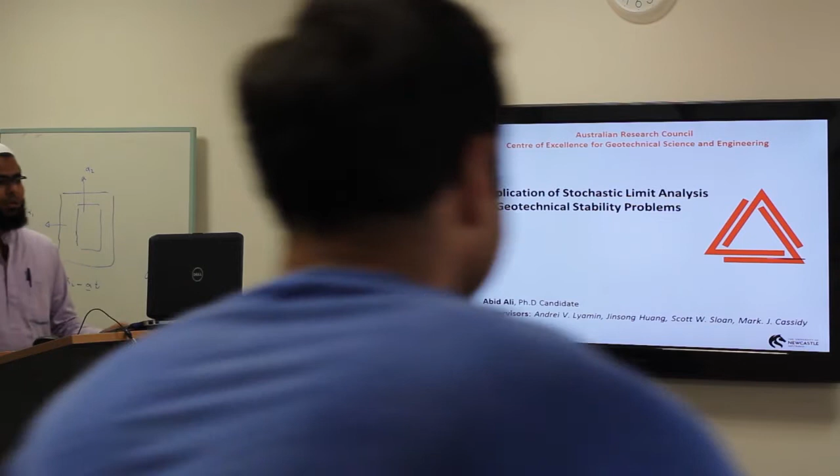Morning to all of you, and I would like to welcome you all to this presentation today, which is on application of stochastic limit analysis to geotechnical stability problems.

This is the outline of today's presentation. In the introduction I will talk about the importance and objectives of the present research work, then the theory and literature review related to the present work will be discussed. After that, I will present two studies I have investigated up to now: one is the deterministic study, boundary effects, and the second is the probabilistic study, which is about risk assessment of landslides. In the last part of the presentation, the future research objectives will be discussed.

Coming to the types of uncertainty, uncertainty in geotechnical engineering can be classified into two types: one is aleatory, and the second is epistemic. Aleatory uncertainty is something which is inherent and cannot be reduced or eliminated, for example spatial variability of soil properties in a nominally uniform soil layer. Whereas epistemic uncertainty is something that can be reduced or even eliminated.

So in the present research work, I have just focused on the aleatory uncertainty that is due to spatial variability of soil properties.

Now, most of the stability analysis in geotechnical engineering adopts a deterministic approach, in which uniform soil properties are considered and the spatial variability is assumed to be considered indirectly by considering a factor of safety. Obviously there are some limitations in this regard because deterministic analysis does not explicitly account for spatial variability.

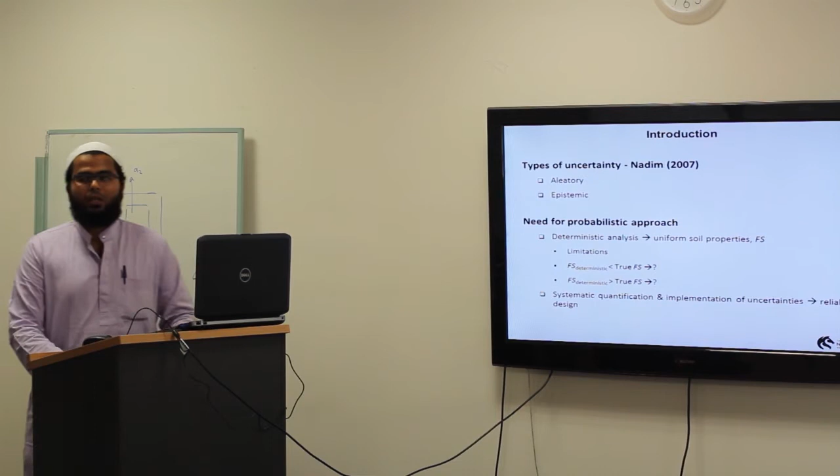What happens is, if the factor of safety using a deterministic approach, which ignores the spatial variability, is less than the true factor of safety of the slope, the design will be uneconomical. On the other hand, if it is greater than the true factor of safety of the slope, the design will be unsafe. So therefore, we need to systematically quantify and implement the uncertainty into analysis in order to achieve reliable designs.

Now coming to the importance of the present study, slope stability is an area that is highly amenable to probabilistic treatment, and it continues to receive much attention, and this could be because landslides have severe consequences.

A recent study revealed that between 2004 and 2010, more than 30,000 people have been killed due to landslides, and these landslides exclude those caused by earthquake. Apart from causing fatalities, landslides also cause damages to infrastructure and properties worth billions of dollars every year.

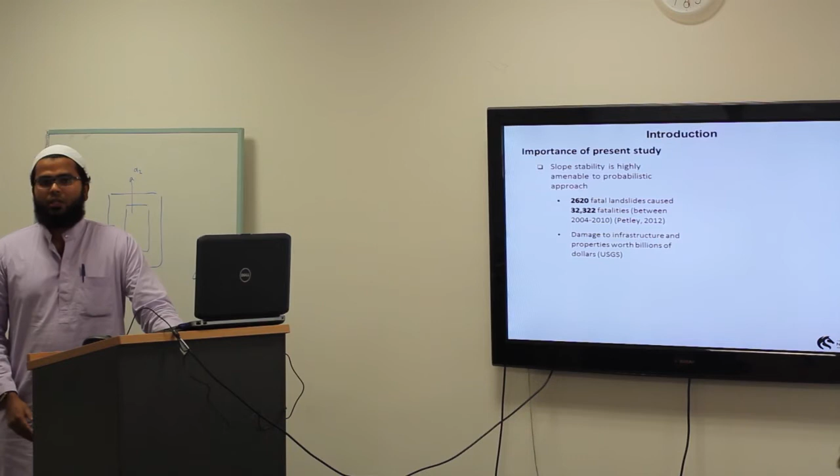Due to spatial variability of soil properties, complex failure mechanisms also tend to evolve during landslides, and therefore there is a need to develop innovative methods for landslide risk assessment which can consider the uncertainty in the soil properties.

Now I will discuss the objectives of the present study. One of the major objectives is to combine random field and finite element limit analysis. Why? Because finite element limit analysis is an excellent tool for predicting the collapse state of the slopes, whereas random field can effectively consider spatial variability.

And the second stage involves incorporating unsaturated seepage analysis, so that the framework of random field and finite element limit analysis can then be used to predict the probability of failure during rainfall.

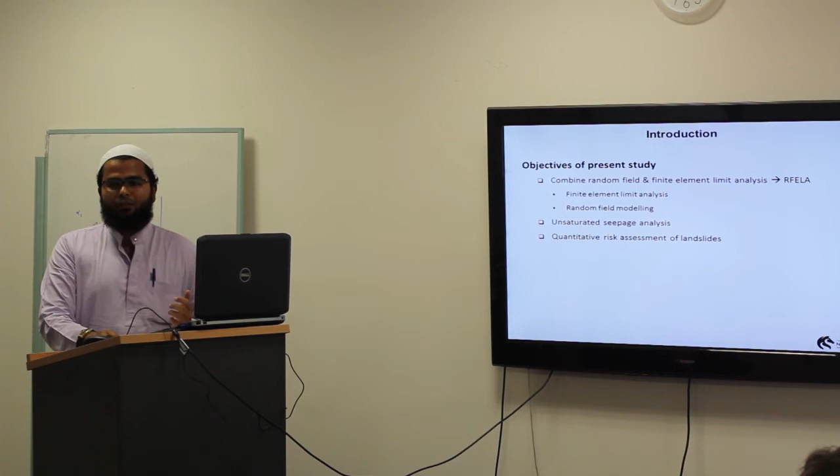And lastly, using the quantitative risk assessment of landslides framework, the risk from different sources of uncertainty can be evaluated.

Now this method is general in nature, and it is extendable to other geotechnical engineering problems as well. But to begin with, we actually did a 1D deterministic study, and then we progressed to a 1D probabilistic study. This 1D deterministic and probabilistic study involve unsaturated seepage analysis, and our ultimate goal is to perform 2D probabilistic studies which also involve unsaturated seepage analysis.

So now I'll discuss a few of the commonly adopted probabilistic approaches for slope stability.

The first is the second moment method, which yields a reliability index beta. Here mu FS is the factor of safety based on mean values, and sigma FS is the standard deviation in the factor of safety. The problem with FOSM is that it yields non-unique solutions depending on how the problem is formulated.

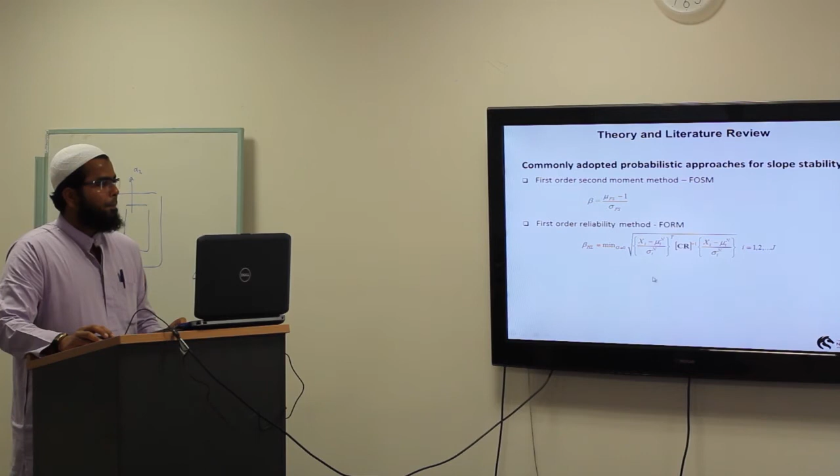Then we have the first order reliability method, FORM, which yields another reliability index called the Hasofer-Lind reliability index. This process basically involves finding a set of random variables x having a mean mu and standard deviation sigma, so that the limit state function g is minimized, where CR is the correlation between the random variables. FORM is a better procedure than FOSM, but the problem is determining the limit state function in complex problems.

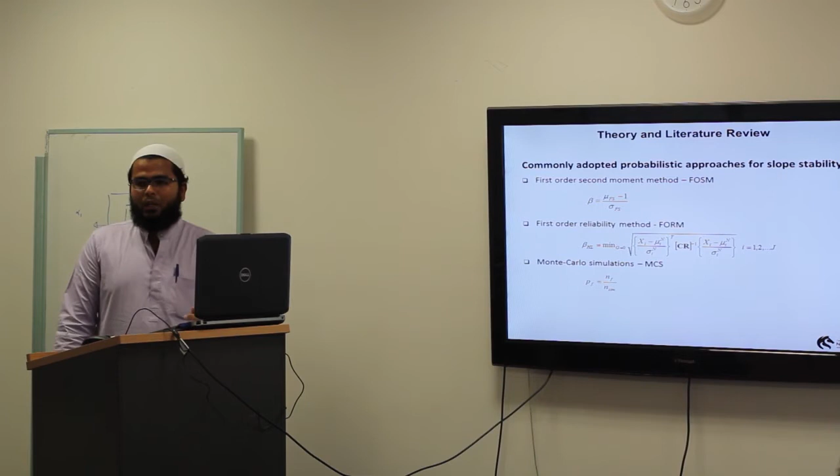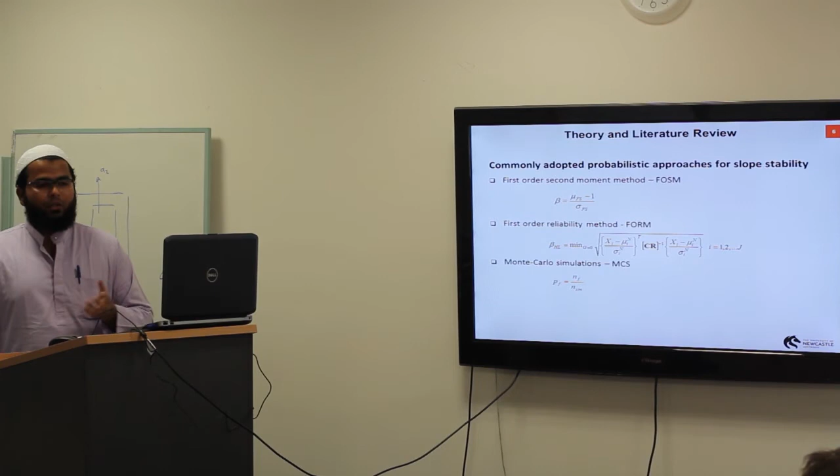Then we have the Monte Carlo simulation technique, in which multiple simulations are performed based on different values of random variables sampled from a distribution. It yields the probability of failure, defined as the number of simulations resulting in slope failure divided by the total number of simulations. Monte Carlo simulation is simple in concept and can be extended to difficult problems, but sometimes a large number of simulations may be required when the probability of failure is low, and in those cases we can use different sampling methods to reduce the number of simulations.

Coming to the random field theory, what is a random field? In a random field, the soil property at a point is assumed to be a random variable, and it is then considered to be correlated to the random variables at adjacent points in some manner. The set of all random variables in a domain is called a random field.

Though the first order methods, FOSM and FORM, have been combined with random field for slope reliability, there are some limitations in this regard, basically due to the use of limit equilibrium methods, which cannot properly consider spatial variability.

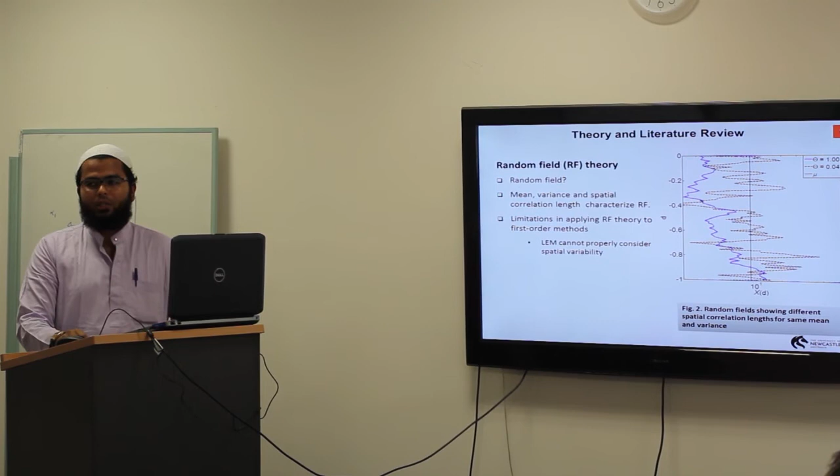On the other hand, we have the random finite element method, which combines a random field and finite element together for predicting slope reliability, and it can effectively consider the spatial variability.

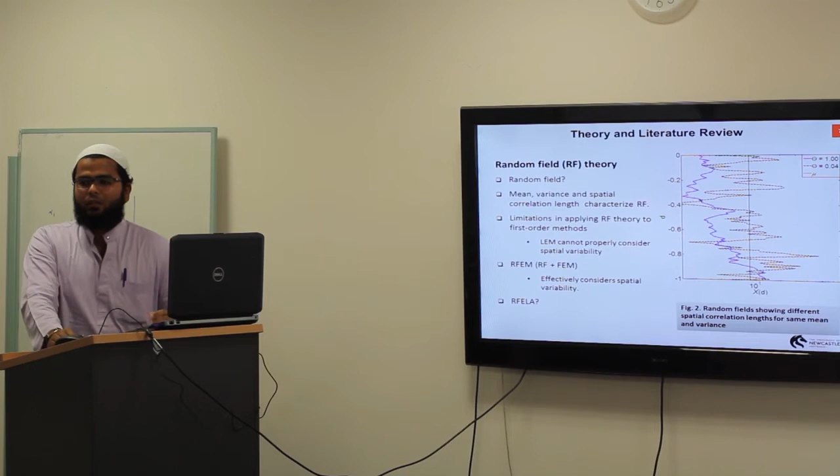Regarding the combination of random field and finite element limit analysis, not many studies are present in the literature, so there is much scope of work in this area.

Now for probabilistic slope stability analysis, we require a deterministic method of assessing the stability of slope. So here I will discuss some of them.

Limit equilibrium method is the most simple one, and it has been used for quite a long time, but its biggest disadvantage is that it requires an assumption regarding the failure surface, and poor assumptions of the failure surface can lead to poor estimates of the stability.

Finite element method, on the other hand, does not require any assumption about the failure surface, but it requires excessively large computational time, and it basically relies on non-convergence as an indicator of collapse in the slope. So care should be taken that the non-convergence is due to collapse only and not due to some other numerical effect. A common limitation observed in these two methods is that there is no indication about the error.

Finite element limit analysis, on the other hand, has no assumptions regarding the failure surface. It is efficient, it is robust, and it gives a bound on the error.

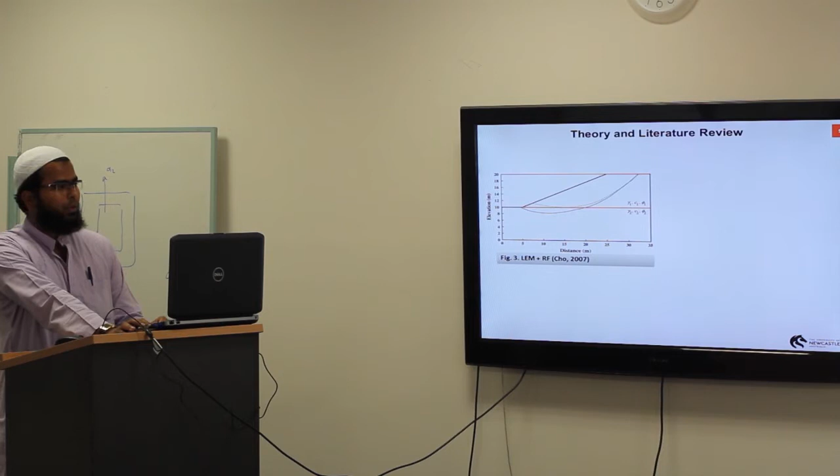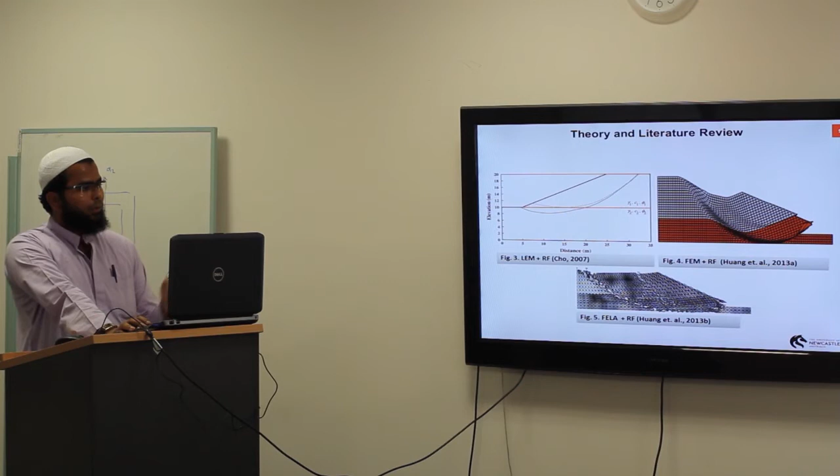This figure shows an example of limit equilibrium method combined with random field. This shows an example of finite element method combined with random field, and this shows an example of finite element limit analysis combined with random field. We can see how well the finite element limit analysis can predict the collapse state in slopes.

Since I have performed a few studies on rainfall induced landslides, I would like to present the two most important factors which affect the stability of a slope during landslides. The first is the saturated hydraulic conductivity.

Previous researchers have suggested that instead of using saturated hydraulic conductivity alone, it is better to use the I by Ks ratio, where I is the rainfall intensity and Ks is the saturated hydraulic conductivity. As this figure shows, as the I by Ks ratio increases, there is a greater reduction in the pore water pressure. Previous studies reveal that a critical I by Ks ratio exists, beyond which there is a maximum reduction in the pore water pressure and the factor of safety.

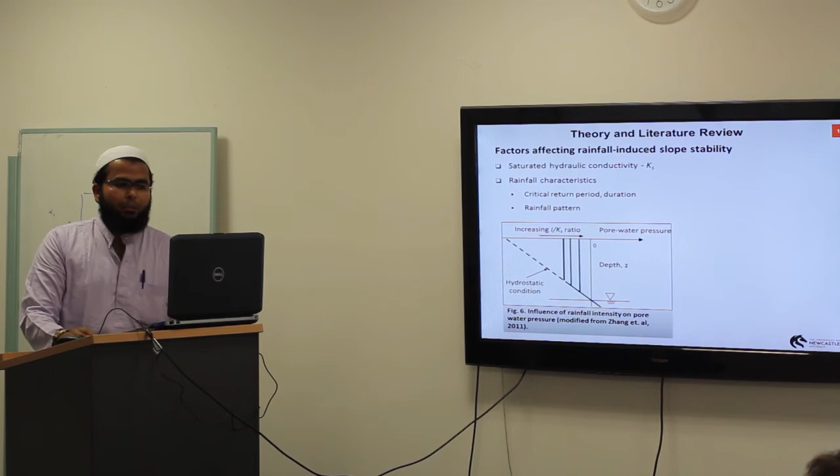The second important factor is the rainfall characteristics. Previous studies reveal that a critical return period and duration exists at which the factor of safety is minimum. Also, four rainfall patterns have been investigated, among which the advanced rainfall pattern has been found to be the most critical in reducing the pore water pressure and the factor of safety of the slope.

Now we'll talk about the risk assessment framework. This figure shows the traditional risk assessment framework, where the probability of failure is calculated from a number of Monte Carlo simulations and it is multiplied by a fixed consequence to get the risk.

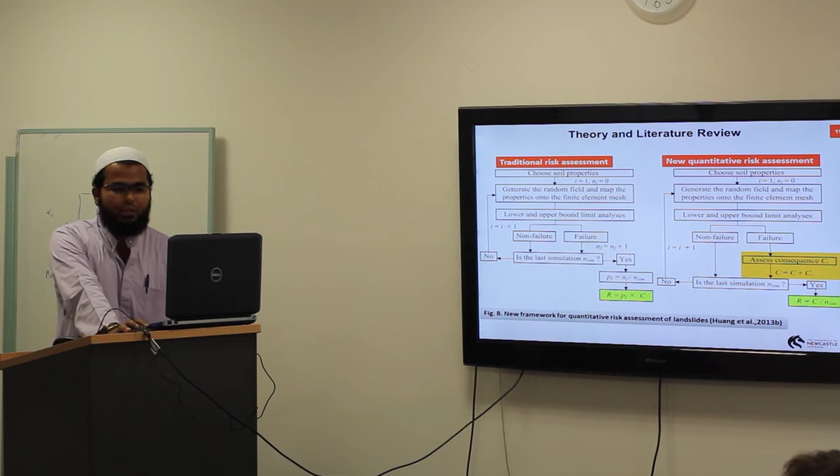On the other hand, we have the new framework for risk assessment, which says that the consequence should be assessed individually for each failure, and this leads to a modified definition of risk, as can be seen. So I will be adopting the new quantitative risk assessment framework in my studies.

Now, coming to the studies on soil spatial variability, studies which investigated the influence of shear strength variability on slope reliability. Most of the studies which investigated the influence of shear strength variability on slope reliability, they considered the influence only on the probability of failure.

Huang et al. investigated the influence of shear strength variability on landslide risk, but the results had a significant gap, and it was basically due to a coarse uniform mesh which was used for assessing the stability of the slope.

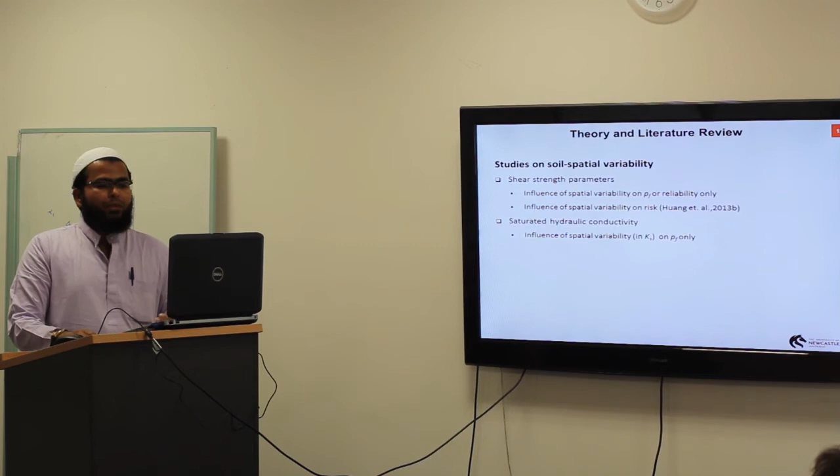And then studies which investigated the influence of spatial variability in saturated hydraulic conductivity on slope reliability. First of all, there are a few studies in this area, and also most of the studies, they investigated the influence once again only on the probability of failure.

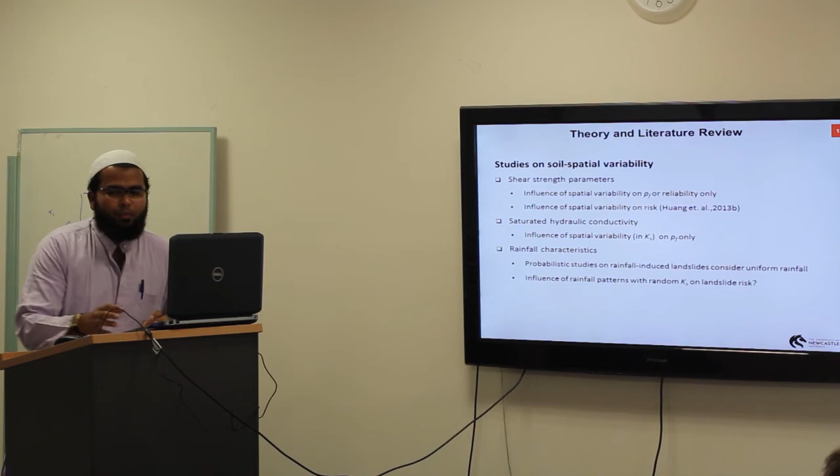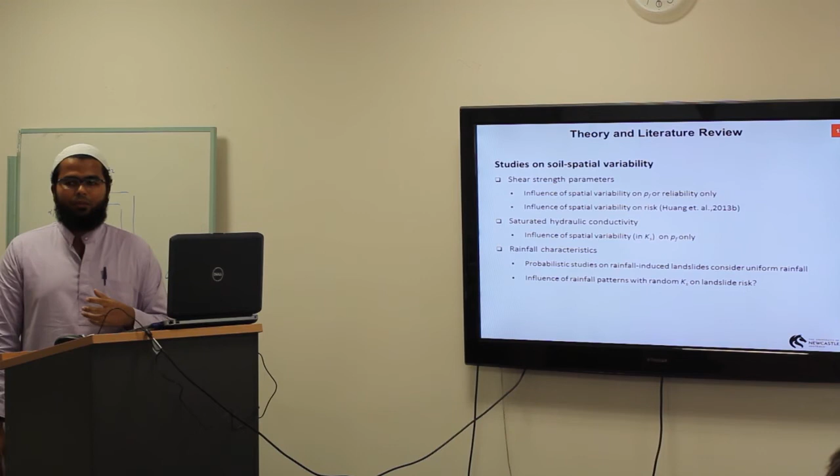And lastly, we have the rainfall characteristics. Most of the studies which investigated rainfall induced landslide using a probabilistic approach, they considered a uniform rainfall and no variation was generally observed, and therefore there is a scope for evaluating the influence of rainfall pattern with spatially variable saturated hydraulic conductivity on the landslide risk.

As I mentioned before, as the first step towards the big research plan, we initially did a deterministic study, and this is the deterministic study that I will present now. Most of the studies which considered rainfall-induced landslides, they generally have an infinite slope with an impermeable boundary. This sort of predetermines the failure surface. In reality, it is possible that other boundary conditions can exist, so no study has actually systematically investigated the influence of different boundary conditions on the failure.

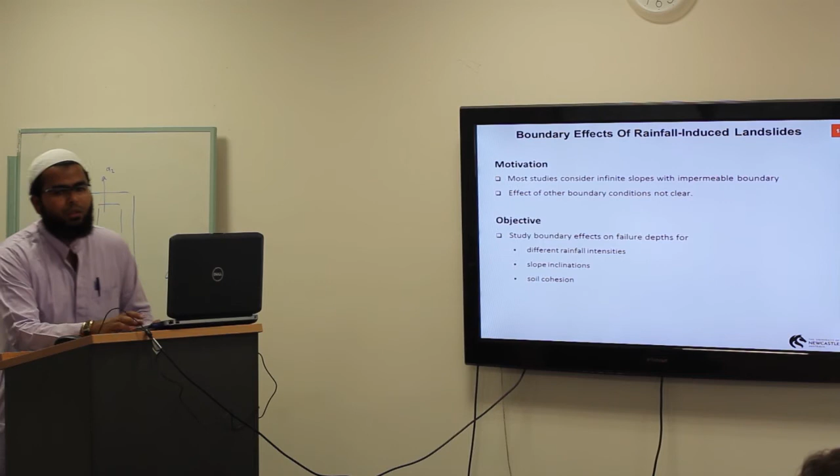That is why the objectives of the present study are to evaluate the effects of boundary conditions on the failure depth when we have different rainfall intensities, different slope inclinations, and different soil cohesion.

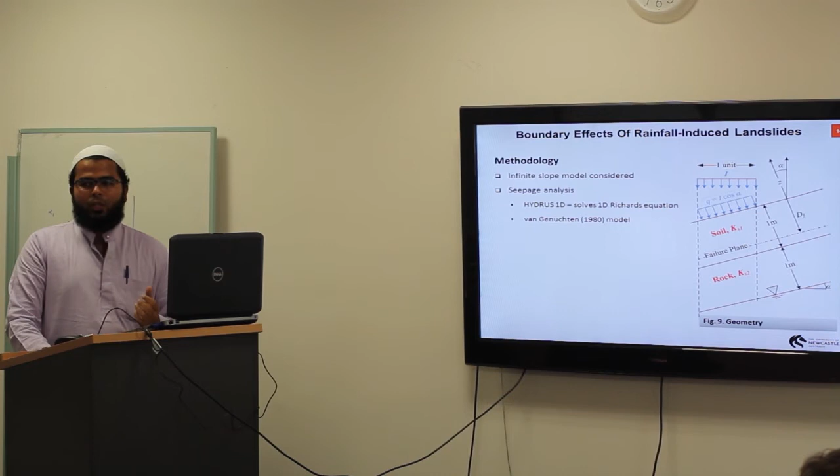Coming to the methodology, I considered an infinite slope, and this figure on the right shows the geometry of the slope. I will explain the geometry later. Rainfall infiltration was modeled using 1D seepage analysis, which was done in Hydrus 1D. Hydrus 1D basically solves a modified form of 1D Richards equation, and we use the Van Genuchten model as the hydraulic model.

Slope stability was assessed using this analytical expression, where phi dash and c dash are the effective shear strength parameters, and alpha is the slope inclination, SE is the effective degree of saturation, UW is the pore water pressure at the failure depth, and W is the weight of the failing soil mass.

I used the Mohr-Coulomb model to define the shear strength in terms of effective stress parameters, and the Bishop's formulation was used to extend the Mohr-Coulomb model to unsaturated soils. In Bishop's formulation, the pore air pressure UA was considered as 0, and the coefficient of effective stress Chi was considered equal to the degree of saturation SE.

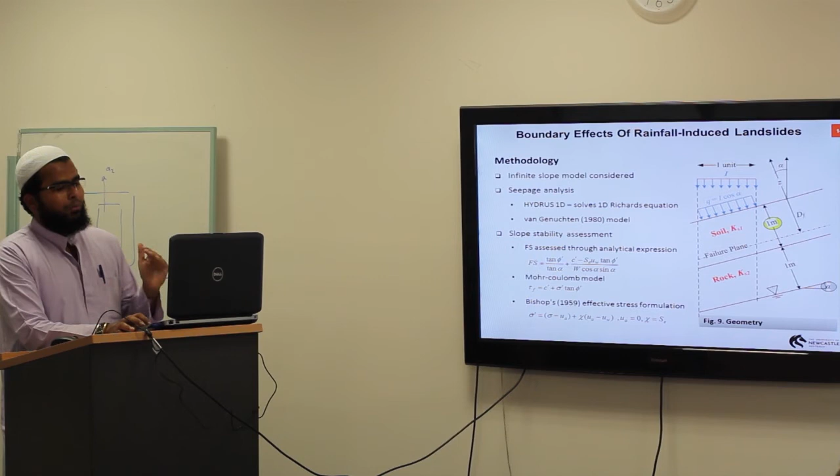Now coming to the geometry of the model that I considered, the slope has an inclination alpha, and it basically considers a 1 meter thick soil layer lying above a rock.

The water table is measured 2 meters along the Z direction, which is the slope normal direction, and the initial conditions are hydrostatic. The rainfall intensity is I, and the flux infiltrating the slope is Q, assumed to infiltrate normal to the slope.

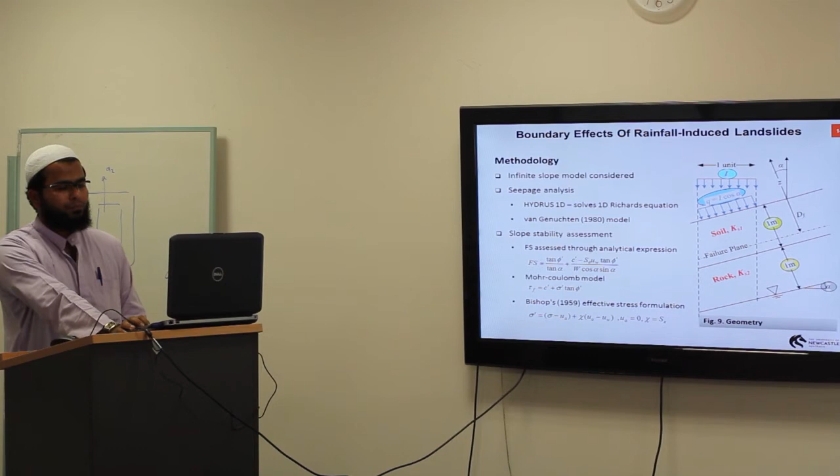The failure depth dF is measured along Z, that is in the slope normal direction. So we considered different boundary conditions by adopting different ratios of Ks1 by Ks2.

Ks1, as shown in the previous figure, is the saturated hydraulic conductivity of the soil, and Ks2 is the hydraulic conductivity of the rock, and this index was used as an index of degree of permeability of the boundary.

If this ratio is very small, the boundary is fully drained, allowing the flux to drain out. If it is very large, it implies an impermeable boundary, and all the infiltrated flux accumulates at the boundary. So we considered 4 cases.

Case 1 considers alpha equal to 36 degrees and a cohesionless soil, C dash equals 0, and this was the base example. In case 2, we increase the cohesion.

In case 3, we change the slope inclination to 40 degrees, but the cohesion was the same. In case 4, both the slope inclination and the cohesion were changed.

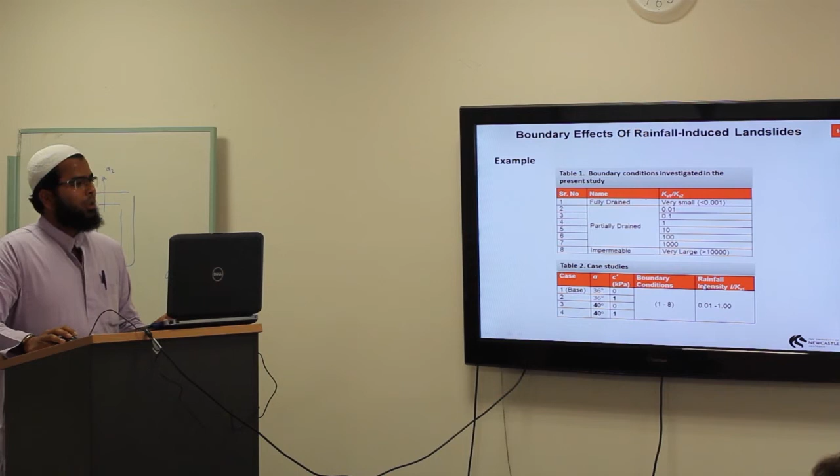Now all the boundary conditions shown in table 1 were adopted for all these 4 cases, and the rainfall intensity was considered in terms of the I by Ks1 ratio, where I is the rainfall intensity and Ks1 is the saturated hydraulic conductivity of the soil.

We considered this rainfall to vary in this range, and we considered 24 different rainfall intensities.

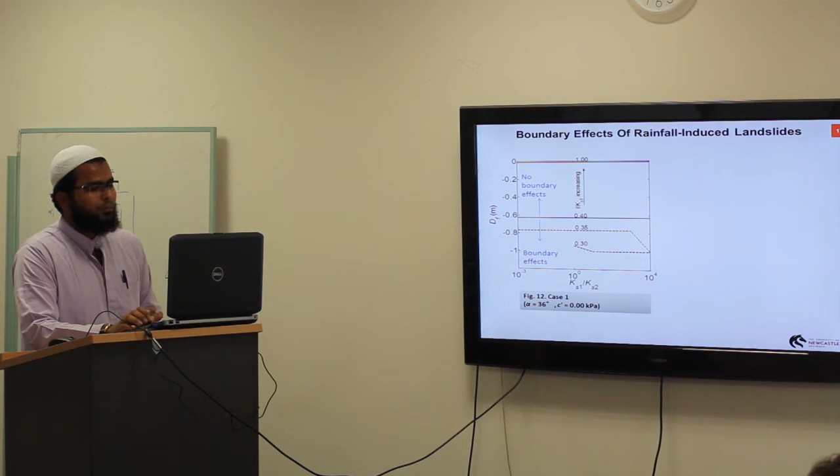The dashed line shows those failures where boundary effects could be observed, and when the rainfall intensity exceeds this value, there is no effect of boundary on the failure. A critical I by Ks1 ratio is observed, which demarcates this boundary influence.

Now in case 1, all the failures were due to loss of suction.

In case 2, we see that there is no influence of rainfall intensity on the failure depth, and all the failures have a constant depth, because the failures occur due to generation of positive pore pressure.

This critical intensity is the value of rainfall intensity up to which the boundaries exercise influence on the failure depths. Once this rainfall intensity is exceeded, the boundaries have no influence on the failure depth.

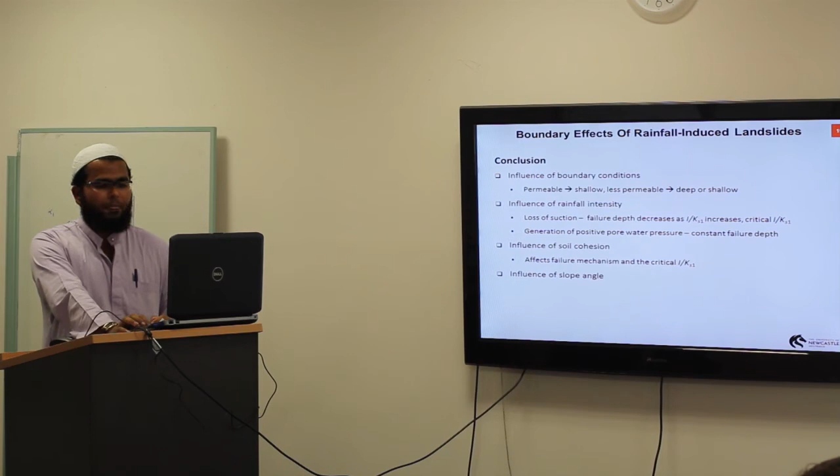When soil cohesion is increased, the critical I by KS1 is increased, which means an increase in the boundary influence. And when slope inclination is increased, the critical I by KS1 decreases, which implies a decrease in the boundary influence.

Now I'll explain the 1D probabilistic study.

Rainfall-induced landslides basically occur in initially unsaturated soil slopes where the negative pore pressure contributes to the soil strength and slope stability.

In the event of a landslide, there are two things which can determine risk. One is the saturated hydraulic conductivity, because it controls the infiltration process, thereby affecting the pore pressure distribution and ultimately affecting the shear strength and the slope stability.

And the failure mechanism, because they affect the failure depths as we observed in the previous 1D deterministic study. So the objective of the present study is to investigate the influence of spatial variability in the hydraulic conductivity on the probability of failure, consequence and risk, and also determine the influence of different failure mechanisms on risk.

Now the same methodology as was adopted in the deterministic study was considered for this case as well, and I considered 2 examples having different soil cohesions. These 2 examples were considered to create different failure mechanisms, and if we have a look at this figure,

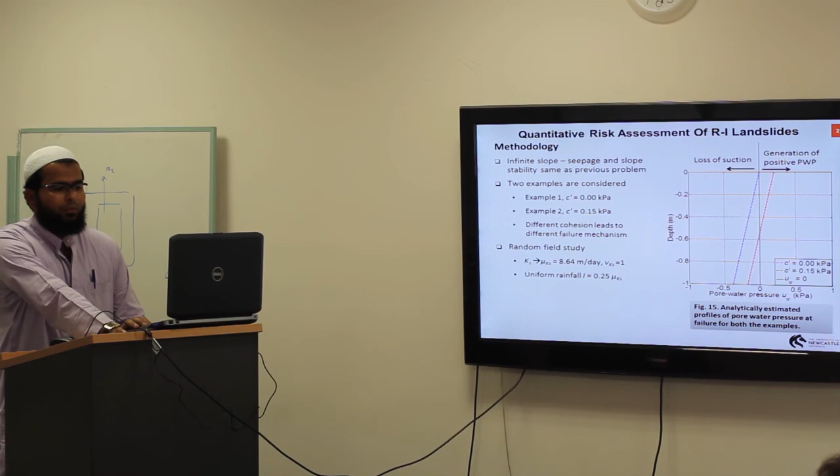Now coming to the random field study, the saturated hydraulic conductivity was considered as a log normal stationary random field having a mean of 8.64 meters per day and coefficient of variation equal to 1. I considered the uniform rainfall intensity equal to 0.25 times the mean value of Ks.

To consider the different degrees of spatial variability, 8 spatial correlation lengths were considered, and I performed 2000 Monte Carlo simulations for each spatial correlation length.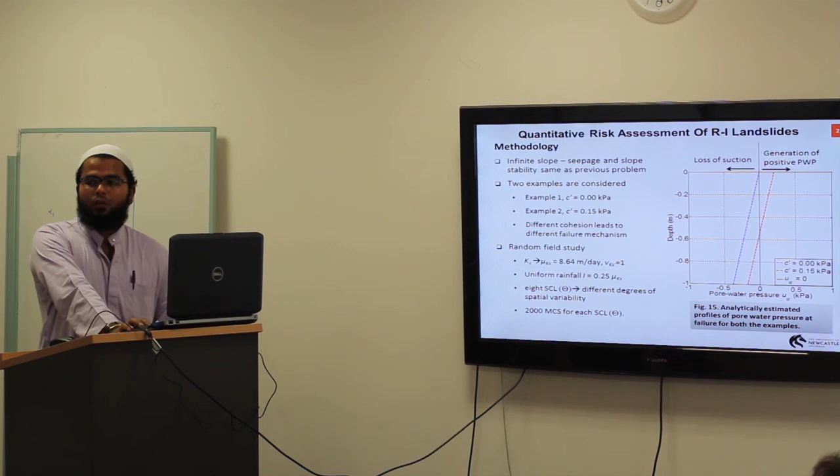Now this figure shows the failure mechanisms occurring, and in this figure the blue hollow points show failure due to loss of suction, and the red solid points show failure due to generation of positive pore water pressure. The black solid line shows the analytically estimated pore water pressure at failure.

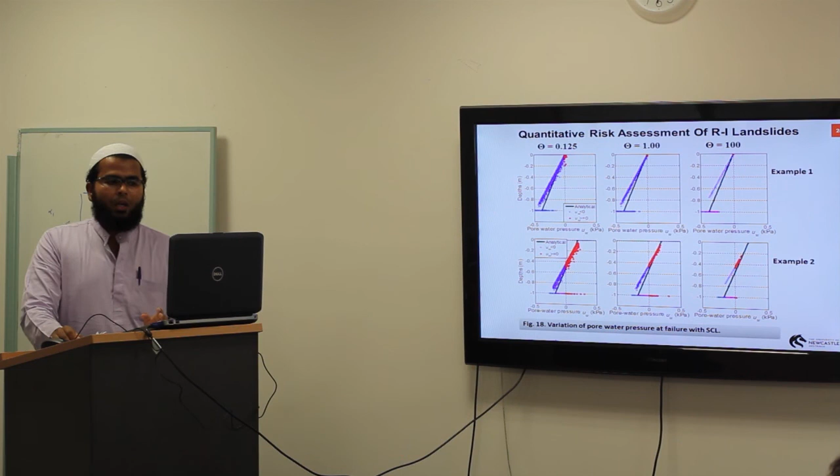I have shown the results for 3 spatial correlation lengths for both the examples, and we can see that when the spatial correlation length is small, there is more uncertainty in the pore water pressure at failure, and as the spatial correlation length increases, the trend in pore water pressure at failure becomes much more uniform and linear because the soil also becomes uniform. This also confirms our assumption about the failure mechanism.

We can see that most of the failures in example 1 are indeed due to loss of suction, and in example 2, most of the failures, in fact in the top half, are due to generation of positive pore water pressure.

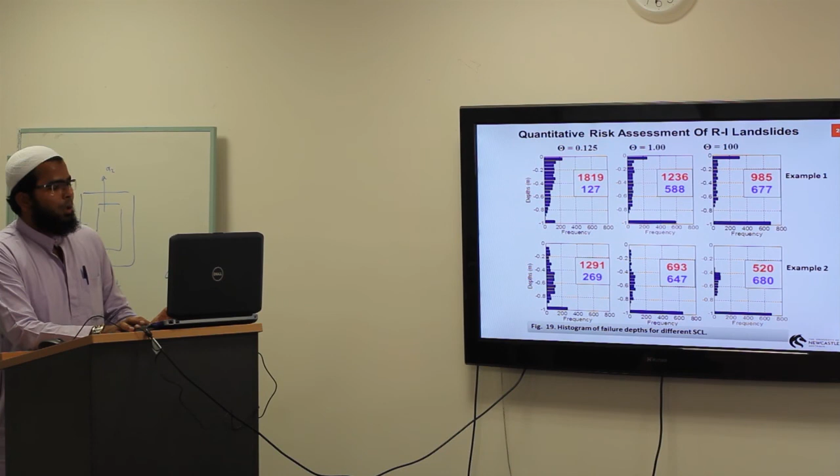This figure compares the histogram of failure depth from the two examples. It's a very interesting figure. This shows how many shallow failures are occurring, and this shows the number of deep failures. We can observe that when the spatial correlation length is small, there are more shallow failures and fewer deep failures. As the spatial correlation length increases, shallow failures decrease and deep failures increase, and this can be observed in both examples.

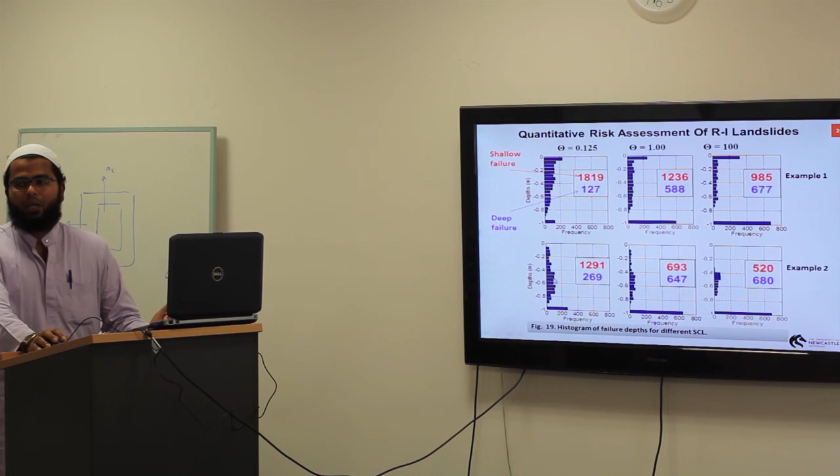Another point I want to make is the pattern of the distribution of failure depths. In example 1, most of the failures are concentrated near the surface, and in example 2, due to a change in the failure mechanism, the failure tends to be deeper.

This figure basically explains the variation in probability of failure: why we have higher probability of failure at smaller correlation lengths, because we have more shallow failures, and why the consequence increases because the deep failures increase and the shallow failures decrease, which is why we see an increase in the consequence.

Another explanation is why the consequence was higher in example 2 compared to example 1. We can see that most of the failures are concentrated near the middle of the soil profile, so failure in example 2 tends to be deeper compared to example 1, and this is the main reason for the increase in consequence of example 2.

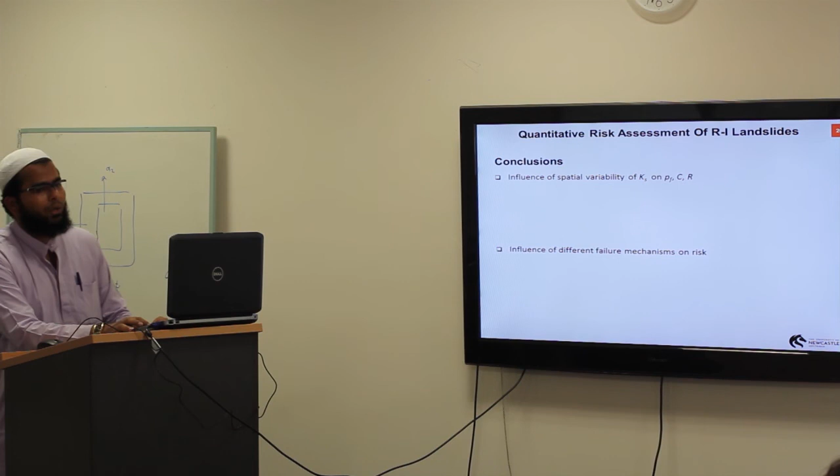Coming to the conclusions: we investigated the influence of spatial variability of Ks on the probability of failure, consequence and risk. We saw that the probability of failure decreases with an increase in spatial correlation length, the consequence increases with an increase in spatial correlation length, and the risk will be maximum at a certain degree of spatial correlation length. Regarding the influence of failure mechanism, when failures occur due to generation of a positive pore pressure, the risk tends to be higher.

Given the work I have already done, I would like to outline the future work. As an initial step, we considered an infinite slope with a 1D deterministic study, and then we did a probabilistic study to incorporate the random field and the risk assessment framework. Now we plan to extend this procedure to 2D slopes.

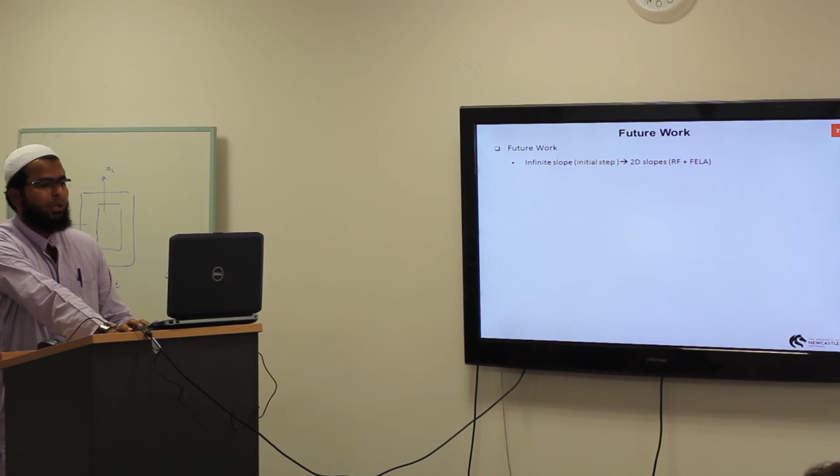By using finite element limit analysis as the deterministic method of slope stability, what we are going to do initially is consider the spatial variability in shear strength for both drained and undrained slopes, and combine the random field and finite element limit analysis. In the finite element limit analysis we will use adaptive meshing.

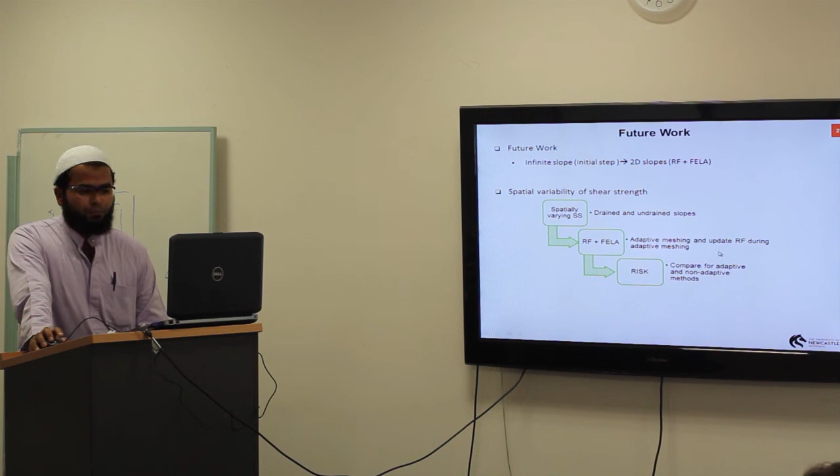Simultaneously, the random field will be updated to account for the adaptive meshing, and then we plan to compare the risk obtained from both the adaptive and non-adaptive methods.

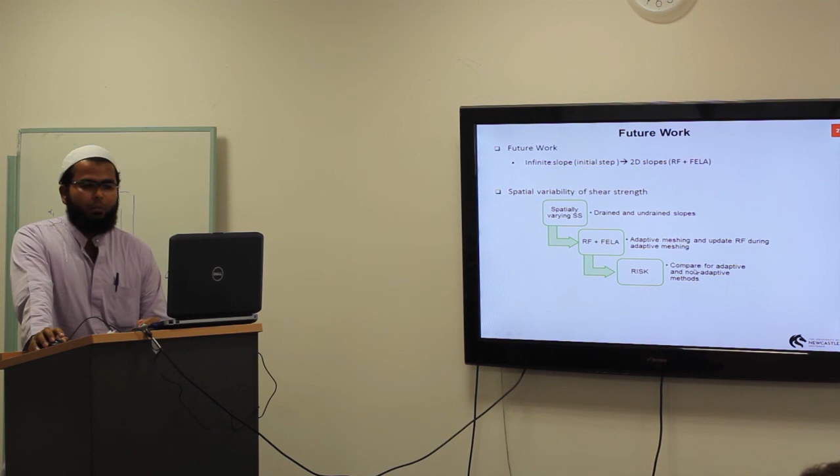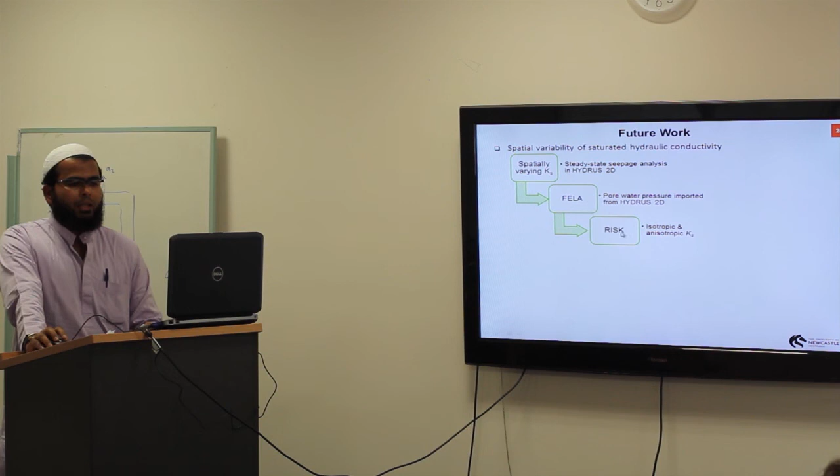In the second stage, we will investigate the influence of spatial variability of saturated hydraulic conductivity on the landslide risk. We will perform steady state seepage analysis using Hydrus 2D, then import the pore pressures from Hydrus 2D into the finite element limit analysis codes to assess stability, and compare the risk for isotropic and anisotropic saturated hydraulic conductivity.

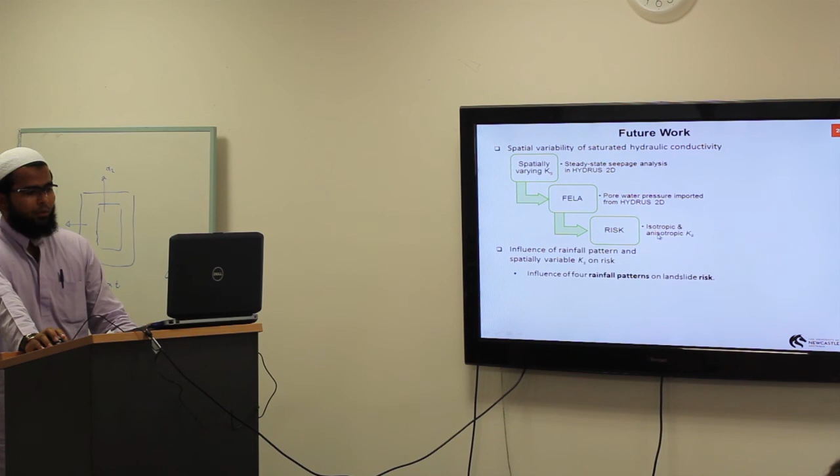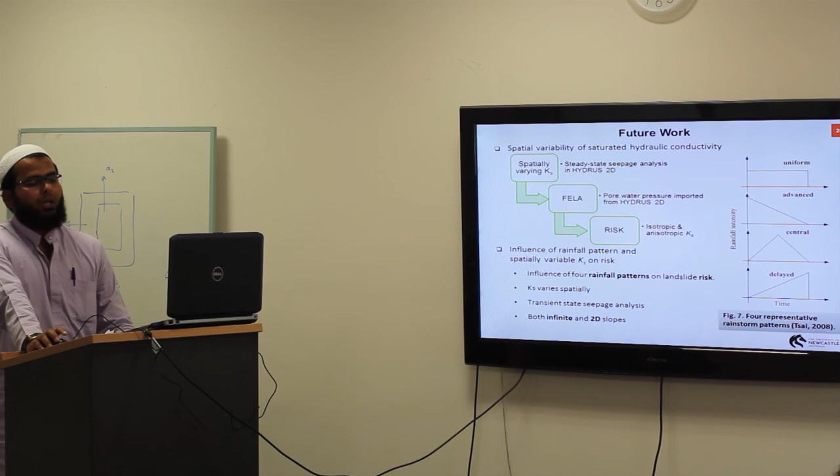In the last stage, I will consider four rainfall patterns. Their influence on landslide risk needs to be investigated, also considering the saturated hydraulic conductivity to vary spatially. This will involve a transient seepage analysis, and this study will be done initially for an infinite slope and then extended to a 2D slope.

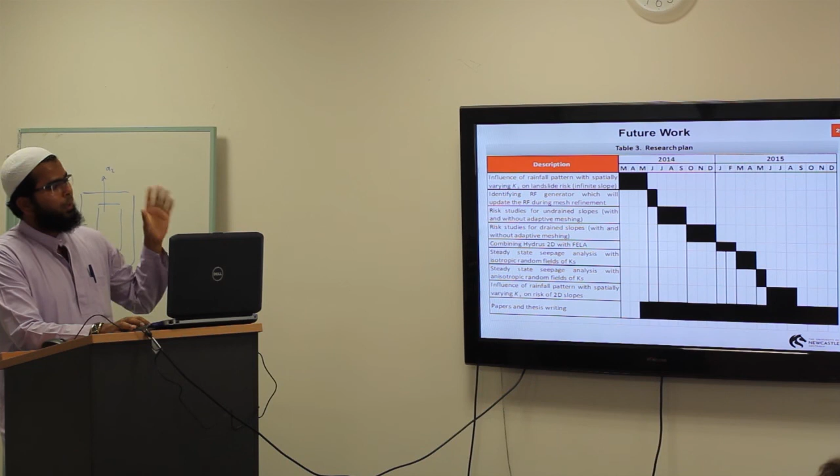This shows the future research plan, with different stages. I'll first be doing the infinite slope, then spatial variability due to shear strength, then spatial variability due to hydraulic conductivity, initially for steady state, and finally for transient seepage analysis.